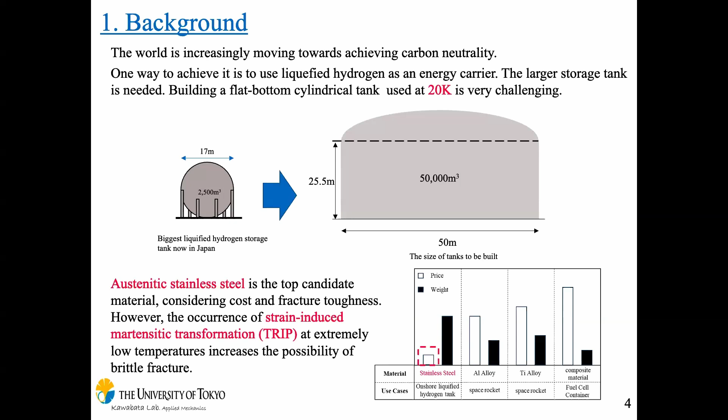So the world is trying to achieve carbon neutrality, and as a part of this, they are planning to use liquefied hydrogen and to develop hydrogen infrastructure such as storage tanks. And for the tank material, austenite stainless steel is considered to be suitable because of its fracture toughness. But in cryogenic situations, austenite stainless steel can transform to alpha martensite, and this is called TRIP. And when TRIP occurs, the possibility of brittle fracture increases.

TRIP is known to depend on some factors such as the temperature, the composition and so on. However, these four researchers have shown that the influence of the stress field is also significant. This graph shows the martensite volume fraction, and we can see that when the stress triaxiality becomes higher, the martensite volume fraction also increases.

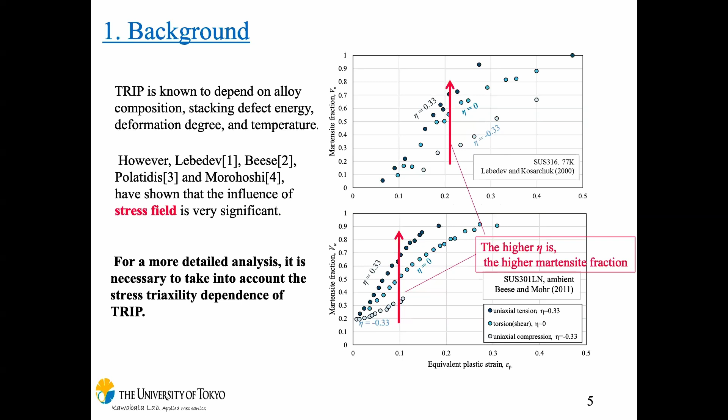But in the conventional elastoplastic FEM, the stress triaxiality dependency of TRIP is not considered. So, for more detailed analysis, TRIP should be considered. So, how to develop the new FEM considering TRIP? In the elastoplastic FEM, the constitutive equation is necessary. The constitutive equation means the relationship between the equivalent plastic strain and the yield stress.

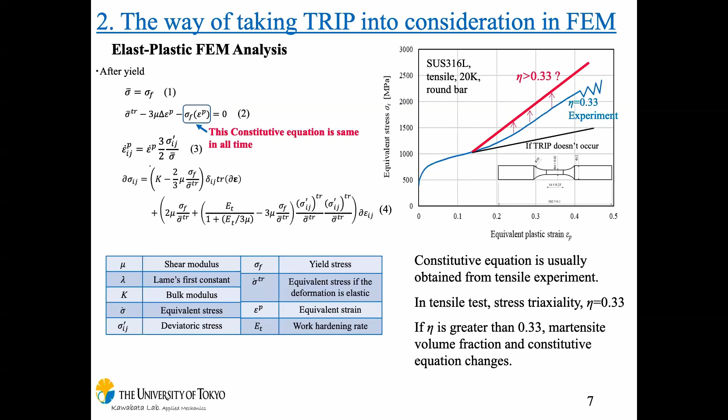The constitutive equation is usually obtained from a uniaxial tensile test, but for austenite stainless steel, this way is not appropriate because the constitutive equation can change depending on the amount of TRIP. For example, if the stress triaxiality is higher than that in the uniaxial tensile test, the amount of TRIP also increases, and as a result, the yield stress also increases. And this is the problem. So I try to solve this problem.

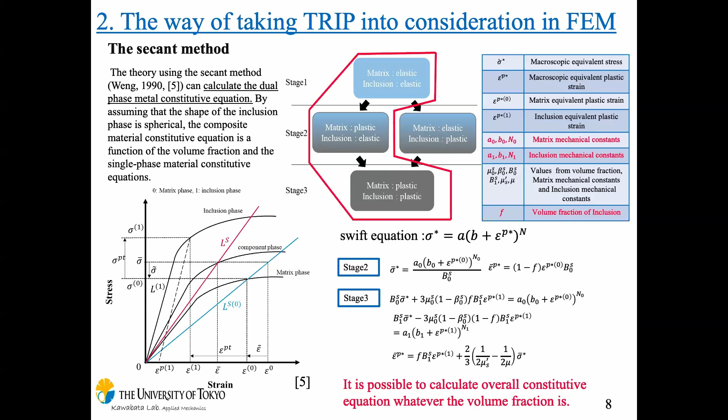So I use the secant method. The secant method is the way to calculate the dual phase metal constitutive equation from the single phase constitutive equation and the volume fraction. There are two phases, called inclusion and matrix. In the uniaxial tensile test, the deformation is divided into three stages. In stage one, both are elastic. In stage two, one of them is elastic and the other is plastic. In stage three, both are plastic. In all stages, we can get the overall stress and strain using these equations, so it is possible to calculate the overall constitutive equation, whatever the volume fraction is.

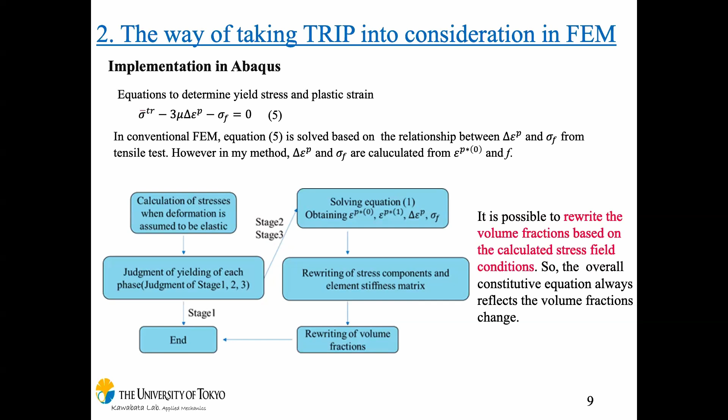So we incorporate this secant method into the elastoplastic FEM. Firstly, we assume the matrix equivalent plastic strain, and we calculate the overall stress and strain using the secant method. Finally, we check whether equation 5 is satisfied or not. This calculation cycle repeats until equation 5 is satisfied. It is also possible to rewrite the volume fraction based on the calculated stress field and plastic strain. So the overall constitutive equation always reflects the volume fraction. This is the good point of this method.

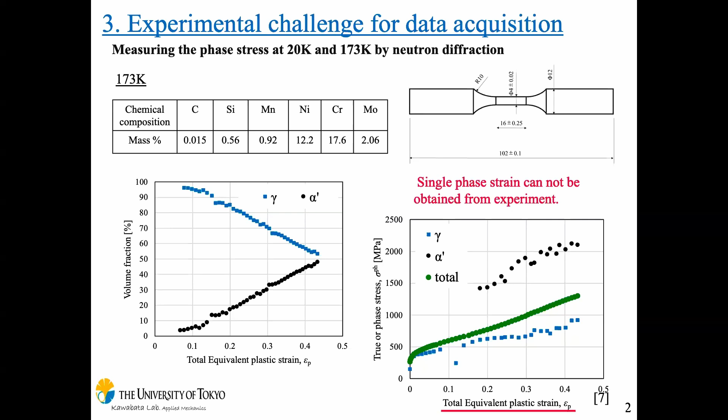Okay, so next we try to get some values to use in the FEM from the experimental result. We have to do two processes. The first is volume fraction fitting. It means that the inclusion volume fraction should be expressed as a function of stress triaxiality and equivalent plastic strain. The second process is to get the single phase strain. We don't know the single phase strain from the experiment directly, so we have to get this. As a result, we can get the single phase constitutive equation.

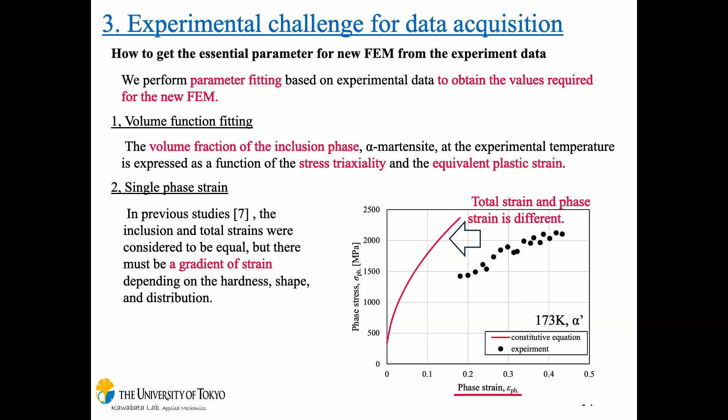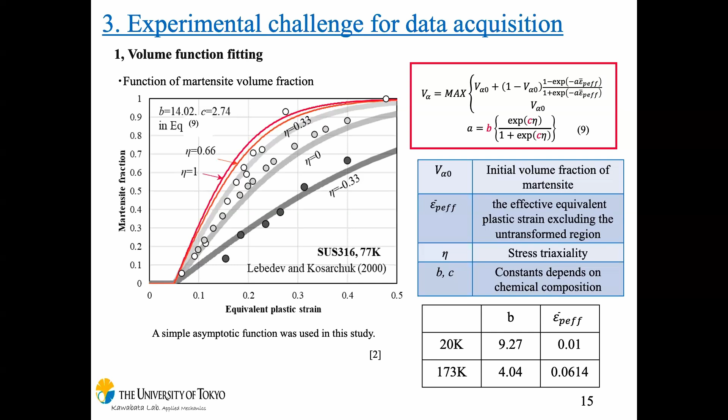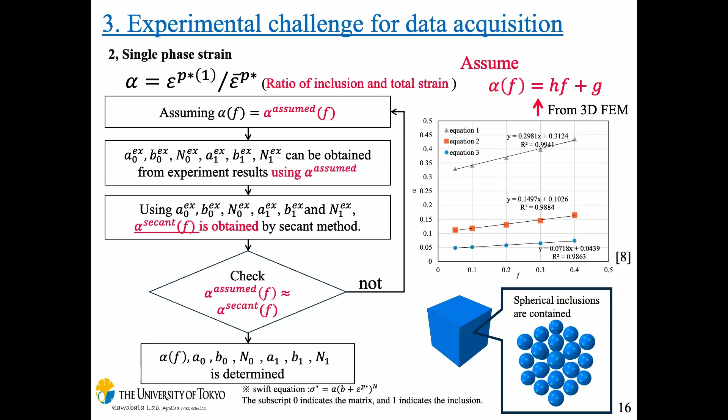Now I explain how to decide alpha. First we assume alpha, and using the assumed alpha, we can get the single phase constitutive equation from the experiment data. But we don't know whether the assumed alpha is correct or not. So next, using the obtained single phase constitutive equation, we solve the secant equations again and calculate alpha again. We call this the secant alpha, and finally we check whether the assumed alpha and secant alpha are close enough. If they match, we get the single phase constitutive equation. We conduct this kind of convergence calculation.

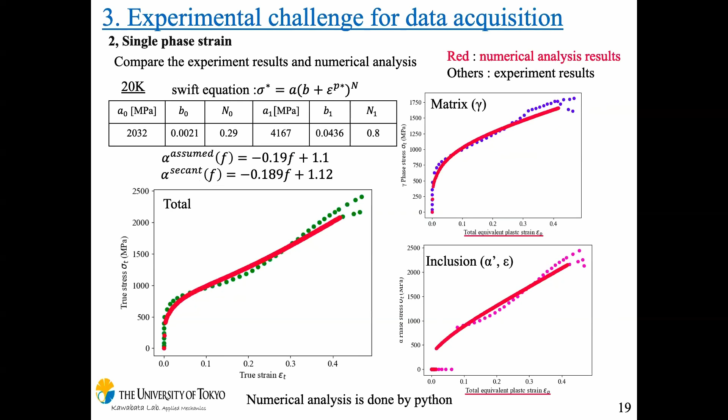Okay, and this is the result of the single phase constitutive equation. Using this single phase constitutive equation, we can get the overall stress and strain result; we solve the secant method using Python code. I think it's in good agreement with the experiment. And this is the result at 20 Kelvin. It's also in good agreement with the experiment result.

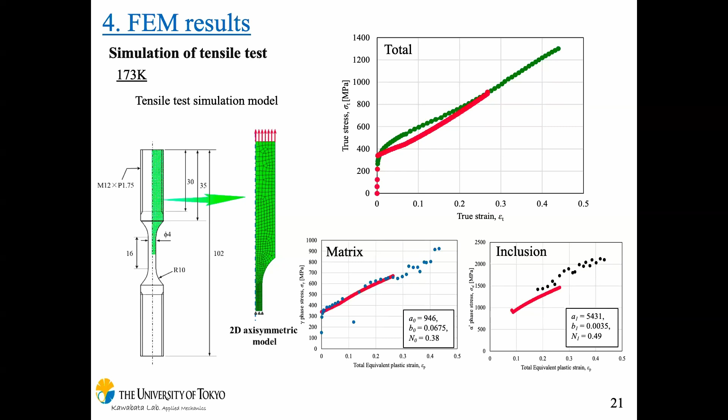Okay, so finally, I show some FEM results. Firstly, we conducted the simulation of a tensile test. After this FEM simulation, we get the result. It's in good agreement with the experiment and numerical analysis. When we use the 20K parameters, we also get a good result.

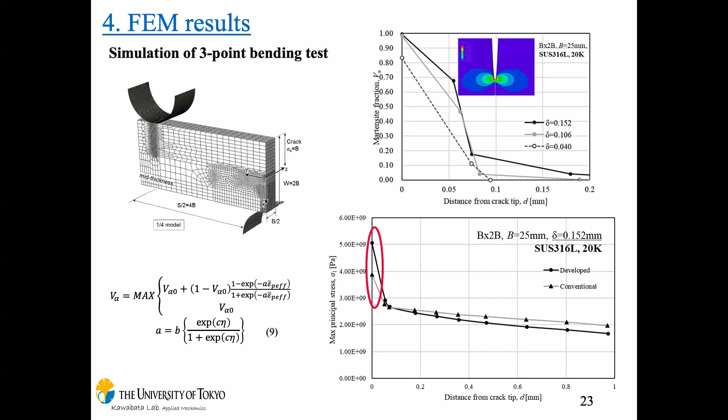Okay, this is the conclusion. We developed a new FEM method to consider TRIP, and in-situ neutron diffraction experiments were conducted to get the single phase stress and volume fraction. By assuming the strain ratio, we can get the single phase constitutive equation. Finally, we conducted some FEM analyses and got good results. In the conventional FEM, the stress may be underestimated at the crack tip.